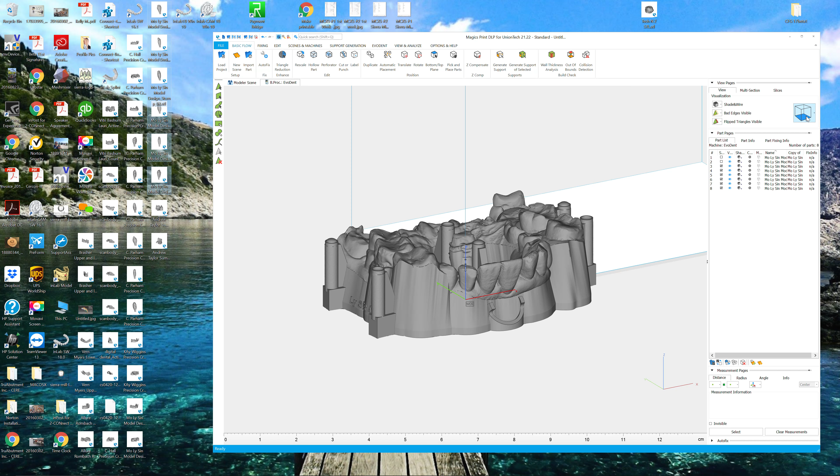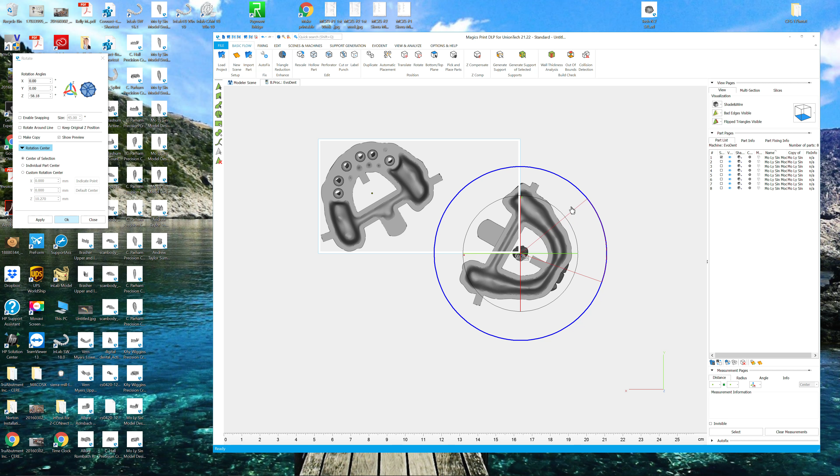So the very first thing I'm going to do is select my models and my dies, bring them in, and place them in. As we do this, I'm not even going to worry about that for the video anyway.

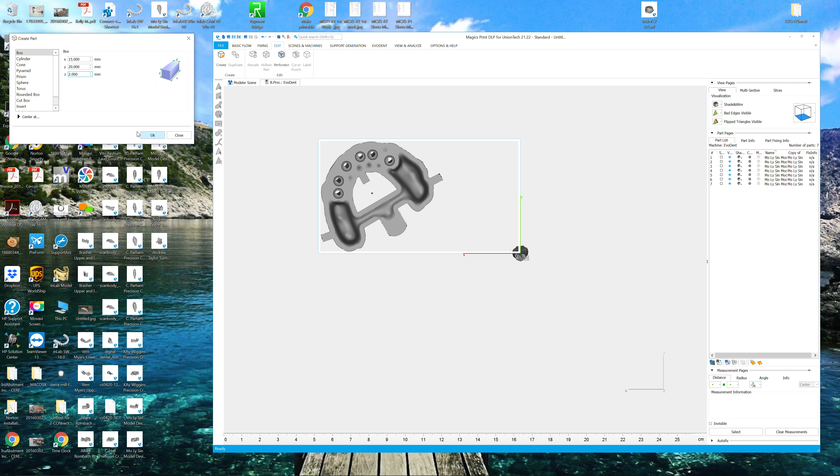What I do is come in here, go to edit, go to create, and on my box I typically do a 15 by 20 by 2 millimeter thick, so make the z-axis 2 millimeters thick. It'll cost you a little bit more in resin, pretty much insignificant to be honest, but it's going to guarantee that your restorations or your dies actually come out just fine.

So once I create that, I bring it over here and put it into place. And then now I have my dies. So when I create my platform, notice it's 1 millimeter on the z-axis submerged within the plate. I'm just going to make that zero.

And then I'm going to select all my dies at once, hit translate, and make these 1.7 millimeters positive, so that'll lift it 1.7 off the plate. So in essence we'll be embedded 0.3 of a millimeter within the plate we've created.

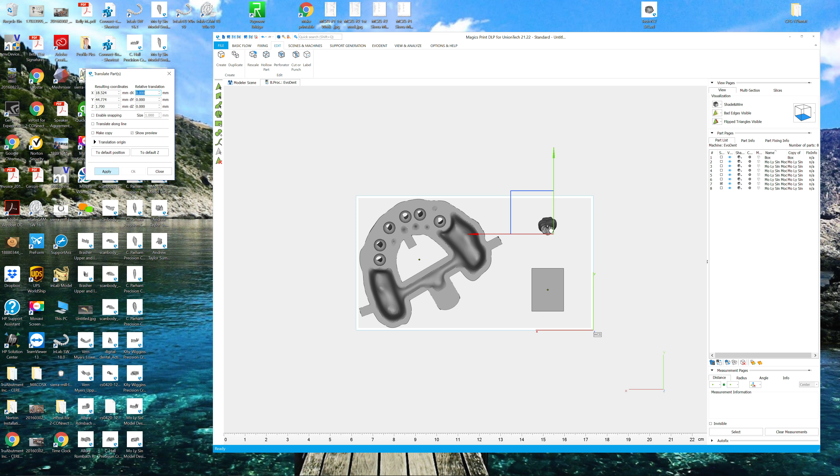Once we have that, we can start placing our dies on here. We can actually do this a little bit easier from the top. I'd say this one would probably... I might need to make this one a little bit bigger.

But for the most part, you just don't want to have... when you have the thicker base plate, it just becomes more rigid. We all know that when we print it's just partially cured, but if you go ahead and make that base plate thicker, you're going to make it more rigid. It's not going to peel off or pop off, but your dies will still separate.

Now this model was prepared through the Sirona Model Builder, so we know they have fairly thin stumps. So a real quick, easy trick: on your base plate, you want to make sure you create that at 2 millimeter z-axis. Once I'm done, I go over here, fix, merge my parts, and then all is good.

Anyway, that's how I battle the fact of my dies not printing. And I tell you what, if you move it to the 20 by 15 or 20 by 20, whatever, you're going to pretty much be guaranteed each and every time that your dies are going to come out just fine, regardless of how skinny they are. All right, thanks guys.